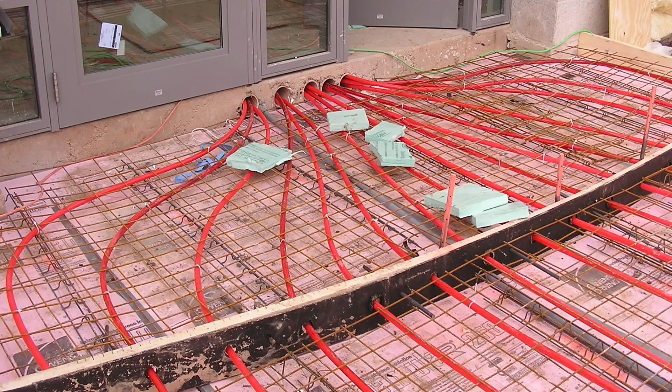Another interesting thing that we did in that building was we recognized that most of the heat that comes to the conservatory right now is from a steam plant, which is in the valley just west of the conservatory. The steam gets piped underground, goes to the conservatory, and then we send the condensate back to be reboiled and sent back to us as steam again.

Well, we recognized that condensate that we're sending back to the steam plant is still warm, and it loses heat as it goes back to get reboiled again. So we said, that's wasting heat. Maybe we can figure out a way to use that heat.

So we put this snow melt system in our front walkway, and it's tied into our building control system and the weather station, so that whenever it senses that it's cold enough or wet enough to make snow or ice, it runs that condensate through a heat exchanger, and we use that to melt the snow in the walkway. It's using waste heat to do that, and it works beautifully. We never have any snow or ice on the front walkway, and again, it's using wasted heat that would have gone back into the ground anyway.

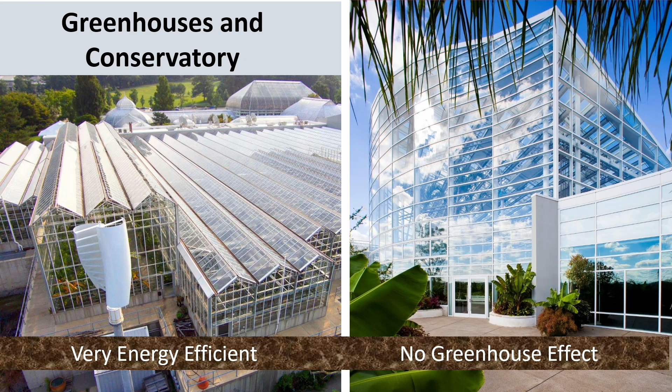For our greenhouses and our new tropical forest conservatory, both of which opened in 2006, we used a number of different strategies. For our production greenhouses, we use the open roof system, which meant it can't get hotter inside than outside, eliminating the need for fans to force hot air out of the building. We also have shade cloths, which function as energy blankets we pull over the ceiling in those rooms during wintertime to save energy at nighttime.

That actually helped us achieve LEED Platinum under the existing buildings program, and it was the first greenhouse to get LEED certified, certified as Platinum.

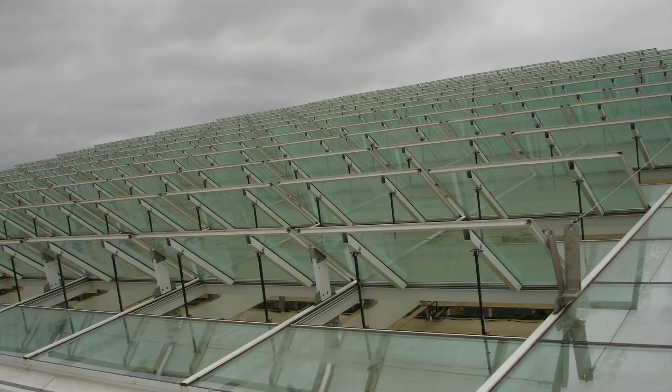Our next project was the Tropical Forest Conservatory. We were intrigued with the idea of opening the roof to let hot air escape, but recognized we couldn't do that with this giant building, so we made it so every other row of glass on the roof would open up. That allowed 50% of the roof to open, letting a tremendous amount of air exit the conservatory and helping keep the building cool.

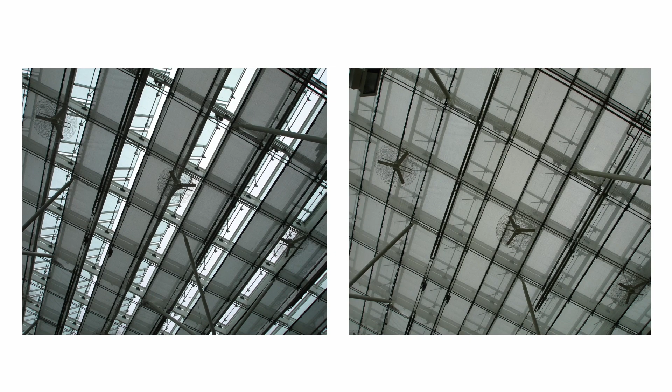We then designed a shading system that closes under the stationary panels of glass in summertime, leaving it wide open under the vents for maximum airflow with no screens blocking it. On the right-hand side, in wintertime we can close all of those shades. They're solid, not perforated, and create an energy blanket in the wintertime, again saving heat.

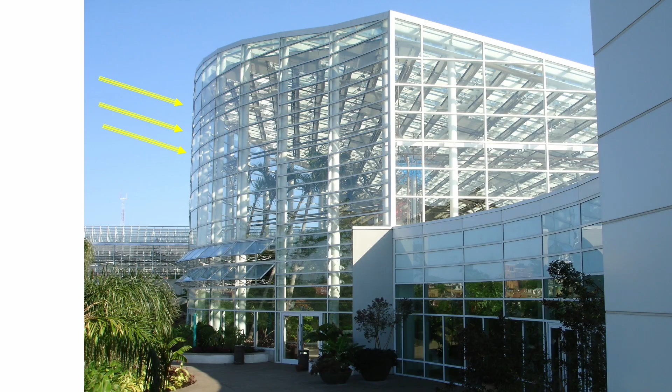Another strategy for this building: we recognized that the conservatory's shape has a really tall south-facing glass wall that slopes back to the north. It was designed that way so you can't see the new building when looking at the old conservatory from the front - we didn't want a modern building in that view. But we recognized that this creates a unique opportunity for us.

Many glass houses and conservatories use single pane glass because double pane glass blocks too much sunlight. In wintertime, when days are short and the sun is low on the horizon, you need as much sunlight as possible. When we did a sun tracking study, we realized that in wintertime, all direct sunlight comes in through that south-facing wall, none from the roof. So we made the roof double pane insulated glass, since that's where you lose most heat, saving a lot of energy. In summertime, when the sun is directly overhead, we want to block some sunlight, so the double pane glass is actually a benefit.

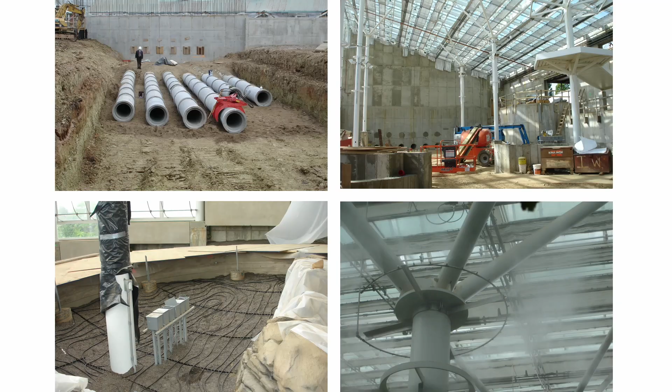Some other strategies we used: we put in 6 earth tubes running under the production greenhouses, each 300 feet long. As hot air exits through the roof, it sucks air through the tubes. They're 15 feet underground, where the ground stays about 55 degrees year round, which helps cool the air before it enters the space - it's like getting free air conditioning.

Our northwest and northeast walls are solid concrete insulated on the outside, so they act as thermal massing. We put a root zone heating system in on the lower left.

We learned that from our friends at Longwood Gardens. The idea is that if you keep the roots of plants warm in wintertime, you can turn the temperature down - great idea. But we made one error: we didn't put a strong enough barrier over the tubes, so when people used shovels to change out plants, they broke the tubes. Lesson learned - make sure you put a good barrier over your root zone heating if you follow that strategy. A misting system also helps with cooling, again reducing costs.

The beauty of this conservatory is it has no greenhouse effect. It's always 4 to 6 degrees cooler inside than outside, and it uses no energy to stay that cool, so it has no greenhouse effect.

Our Center for Sustainable Landscapes, on the lower campus, is a really exciting building for us, and I hope you'll get to see it during the tours. It opened in 2012 and met the Living Building Challenge. It met LEED Platinum, was the first building in the world to get WELL Platinum certified, a measure of how buildings affect human health, and the first building in the world to get SITES Platinum certified, which is sort of like LEED for landscapes.

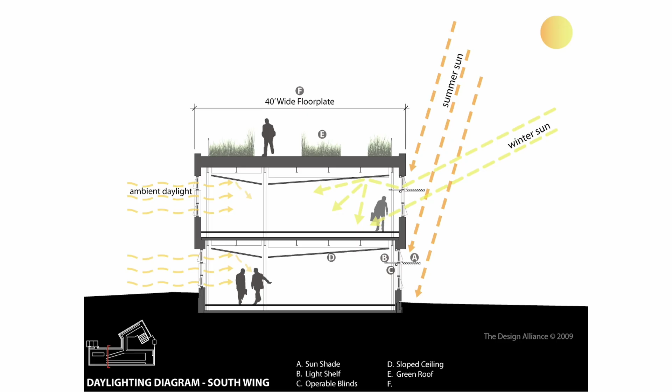So for that building, really important starting out is to maximize passive strategies. The less energy you need, the easier it's going to be to achieve the zero energy certification. So we maximized opportunities for natural daylighting and natural ventilation throughout the space. The building's super well insulated, triple pane glass windows, green roof, all helps hold energy in.

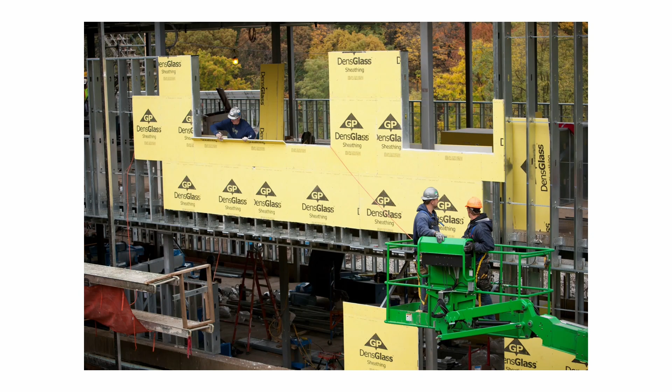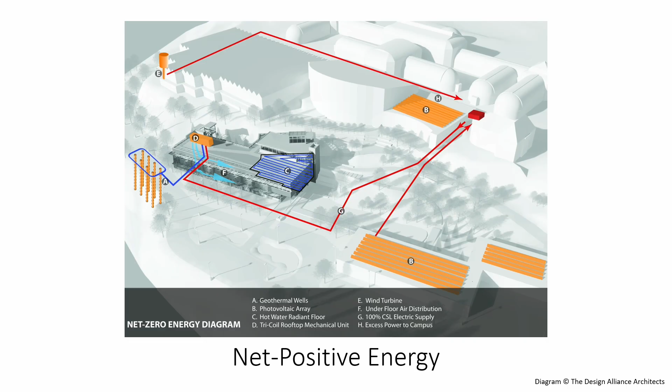And if we're producing energy, we have 16 geothermal wells, each one's 525 feet deep, and they're powered primarily by solar, and that provides all the heating and cooling for the building. For this building, we also used something that was a new technology back in 2011 when we were building the building.

We put in phase change material into all the walls in the atrium and in the roof and the ceilings of all the office areas. Phase change material, when you heat it up, it melts, and then when it solidifies, it releases heat. So we use that as sort of like thermal massing within the spaces to actually help the building stay warmer in the wintertime and help with cooling in the summertime.

The building has power, like I said, mostly by solar power. On some of the buildings, we have some roof solar over some of the parking areas. We also have a small wind turbine that provides a very little electricity, but it's more of a demonstration project. The building produces more energy than it uses each year through all of these different strategies.

Our next building on the lower campus is our nature lab, a modular construction building that met the Living Building Challenge Petal certification, zero energy, completely powered by solar on the roof. Next to it is the Exhibit Staging Center, an old public works building that we renovated to meet the Living Building Challenge and WELL Platinum. That building is a net positive energy building, solar powered, has geothermal wells as well for its heating and cooling, and it makes more energy than it uses every year.

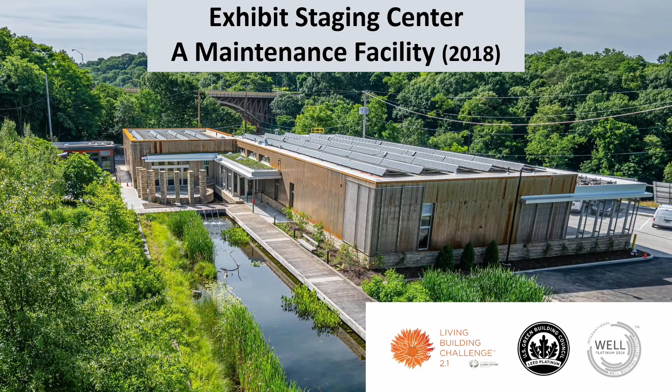A couple of neat strategies in there: battery backup for, I think it's 2 weeks worth, or 10 days worth of battery backup for running the building with the batteries. It also has direct DC lighting in that building.

Whenever you produce electricity with solar panels, it has to be converted from DC to AC to go through your lines within your building. And when you get to your lights, which are mostly LED, you have to convert it back to DC to run the LED lights. You have loss of energy every time you do those conversions. So this building was designed so that the DC power produced by the solar panel goes directly to the lighting, and there's no loss by having to convert it to AC.

So those are some of the key strategies that we used for some of the buildings that we've done work on over the last 20 years.

Looking ahead, we have this old conservatory that, like I tell people, is probably one of the best examples of the worst kinds of buildings you could possibly build. It's a single pane glass building designed to grow tropical plants in a temperate climate, which is crazy by today's standards. But that's what we have, and that's what we have to work with.

So now we're working on strategies to make those be zero energy buildings, as well as these three buildings here, the newer buildings, which our goal when we built these was to make them efficient. Our goal back then wasn't to be zero energy. So now we're going back, looking at this building that we're in right now, as well as the Tropical Forest Conservatory and the greenhouses. How can we make those be zero energy? What can we do to retrofit those buildings?

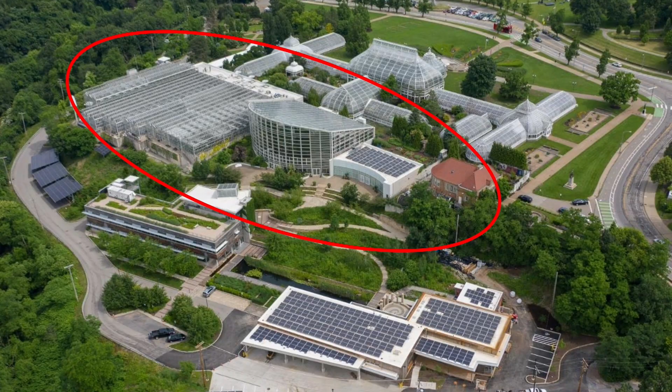But I put this first slide on to show you, in that circle up there, you can see that's the Bellefield Steam Plant. It's a cooperative. I think it's the largest steam cooperative in the country.

It provides all the steam heating not only for Phipps, but all of Carnegie Mellon University, all of the Carnegie museums, all of University of Pittsburgh, as well as all of the hospitals up on the hill over there. So it's a huge plant.

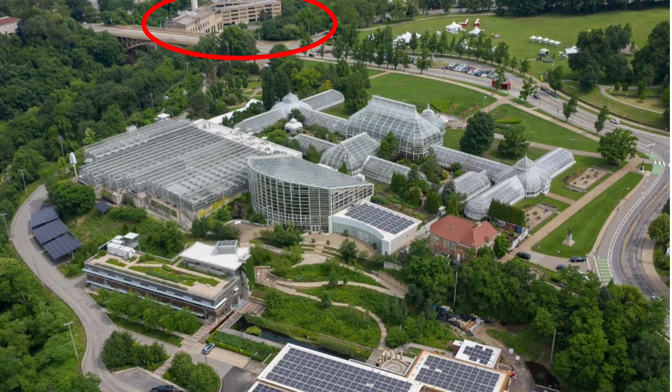It used to be coal-fired up until about 20 years ago when it switched over to natural gas, which was a big improvement, but still it's using a lot of natural gas. We only account for like 2% of the energy they produce, and that's how big a steam plant that is. But we'd like to get off of it. We want to get 100% off of fossil fuels, so that's one of our strategies right now.

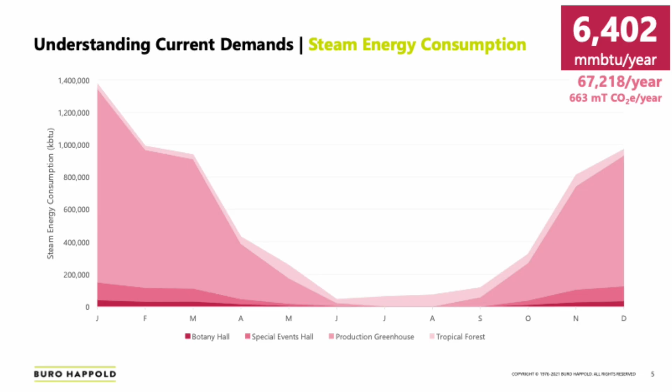So if we're starting with these buildings here, one of the first things that's really important when you're doing this work is to really understand what your current conditions are. This is a graph that shows some of the energy use over the course of a year. Then we start looking at how we can address that.

For us, we're looking at things like heat pumps, geothermal. We also analyze solar PV and solar thermal. I don't have time to go through each of these in detail, but just to tell you some of the things that's really important to look at.

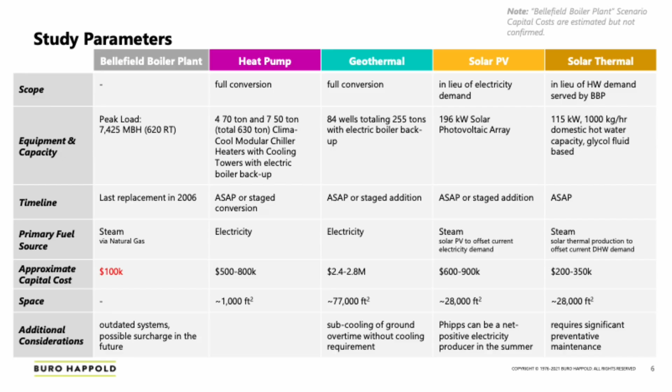Here, again, some of the study parameters, looking at what the energy performance would be. You can see the purple, the heat pumps, and the blue, the geothermal, greatly reduce the amount of energy we would need compared to the one that's gray, that's the Bellefield Steam Plant right now. So those are two really attractive opportunities for us for reducing steam heat and fossil fuels.

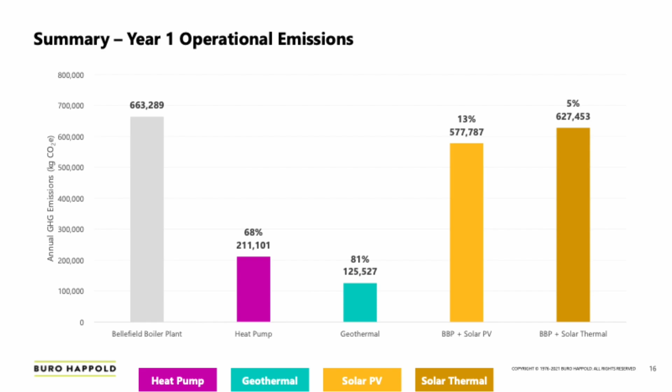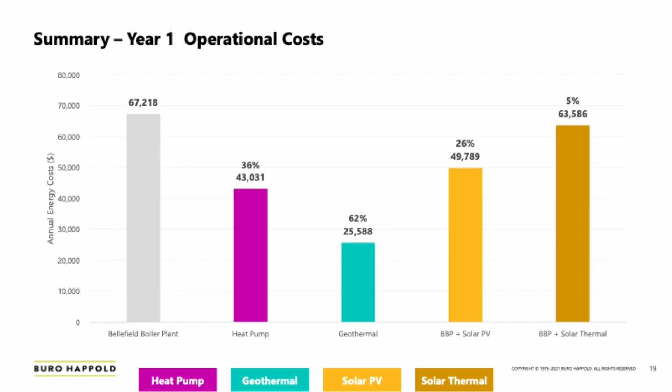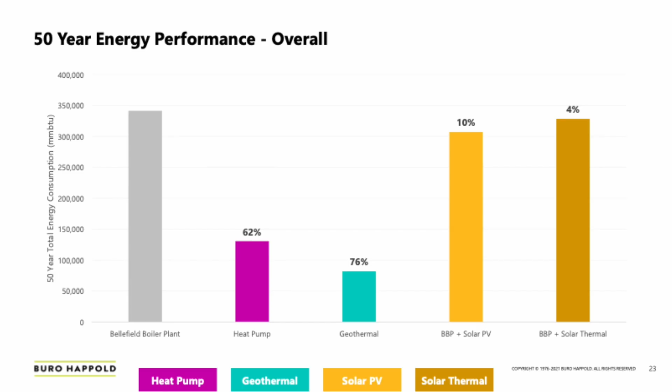For emissions, both of these show quite a significant reduction, with geothermal being much lower. Operational costs, again, the heat pumps and geothermal are much better than any of the others, geothermal being the best. And then look at the 50-year overall performance, because we're really focused on 50-year thinking, that's how we like to look at things when we do things with Phipps. Again, a 62% reduction and a 76% reduction with both of those. Here's a summary of the performance.

And then here, this is important: geothermal is very expensive to install. Drilling wells for us to do wells for our entire upper campus would be over, I think, 130 wells we would have to build. So that's really significant. And even for this portion of the back of the upper campus right here, you can see the geothermal is going to cost more than we would save.

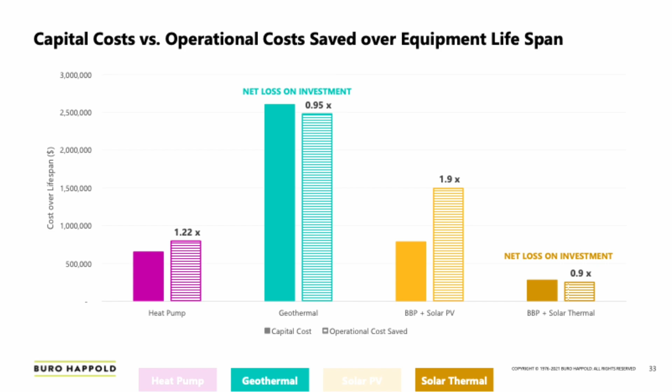On the purple, you can see that the heat pumps actually would help pay for themselves over time. So the heat pumps are becoming a little bit more attractive to us. Still would allow us to get 100% off of fossil fuels. Not as efficient as the geothermal, but definitely much more effective for us. So here are some of the takeaways.

Another advantage of heat pumps is because they're smaller units, you can take some offline and put some online as you do things. Another important consideration with geothermal is it only works if, not only if you're extracting heat from the ground, but in the summertime you have to put that heat back. When you're looking at conservatories and glass houses, typically we're not trying to cool the spaces, so it's going to make the geothermal wells a lot less effective unless we could find a way to use that cooling in the summertime.

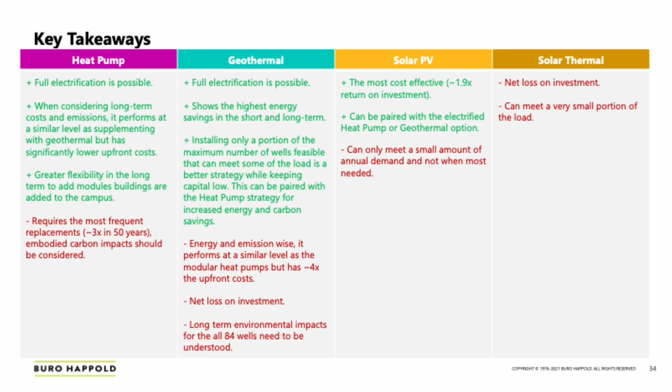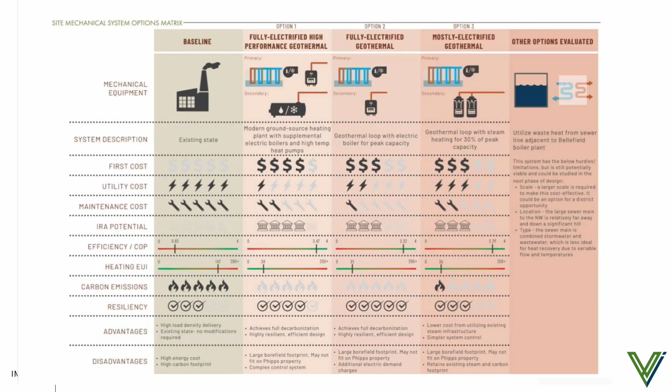Another interesting thing we're looking at is sewer heat recovery. There's a giant trunk line that runs through behind the conservatory. All that warm sanitary water from everybody flushing their toilets and taking showers and everything else running behind us, that's a great opportunity to extract that heat for heating buildings.

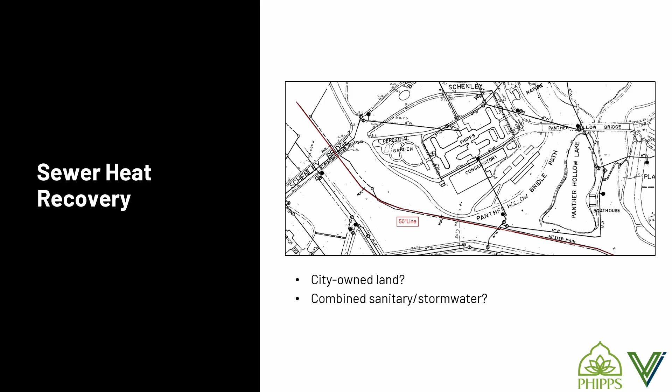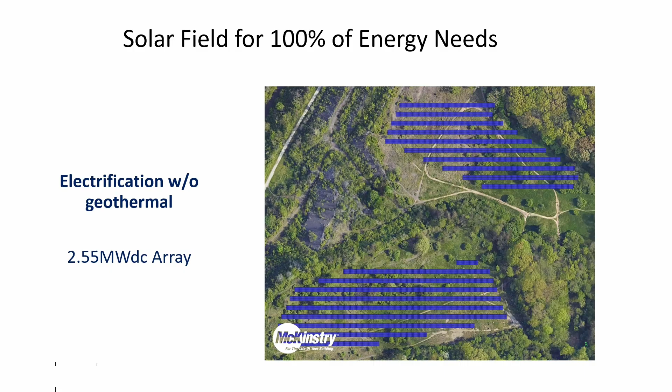It's a little bit too far for us to use, but we're trying to convince the Bellefield boilers to actually build a sewer heat recovery plant. And if they do something like that, we might stay with them for providing energy instead of doing these things ourselves. And then lastly, we're looking at putting in a 2.5 megawatt solar field on an old slag field nearby here. That would get us 100% of our electricity from solar going forward. So those are some of the key things we're looking at at Phipps.

And I'm going to go. Sorry about that. Okay.

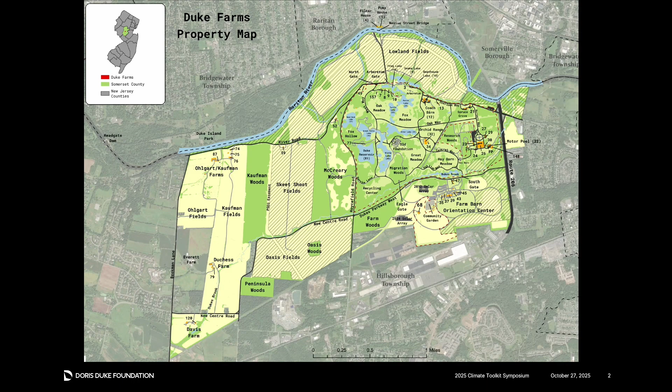So it puts us in a really interesting rural, suburban context, and we operate a lot like a small town. It was a former estate of James Buchanan Duke and Doris Duke. We manage over 100 buildings, and we own our own electrical circuit and utilities, and we welcome over 100,000 visitors a year, and sponsor many mission-related events and conferences. So it's a very active site for the community and for our mission and the foundation's mission, and it gives us an incredible opportunity and responsibility to really model what decarbonization and sustainability looks like at an institutional and campus scale.

Back in 2015, we started what's now called our Natural Systems Energy Plan, which lays out 5 key steps. While it's shown linearly here, I'll note that we're constantly evolving, and the final 3 of these are on a continuous feedback loop. So the 5 steps are: first, establishing a baseline - we quantified our energy use and emissions across all systems. Second, clarifying our goals. Third, prioritizing strategies. Fourth, implementing and optimizing, which we're constantly doing. And fifth, tracking, visualizing and refining. I'll walk you through each one briefly.

First, establishing a baseline. As all of you know, it's super important to understand what your carbon footprint is. So in 2015, we completed both a carbon emissions inventory and a traditional energy audit, because the first thing you want to do is look at energy efficiency and conservation in your buildings and campus to really reduce your demand for carbon emissions. The emissions work helped us understand where our greenhouse gases were coming from, and the energy audit showed where we could make improvements in building envelope work and efficient lighting and things like that - a lot of low-hanging fruit with short payback times.

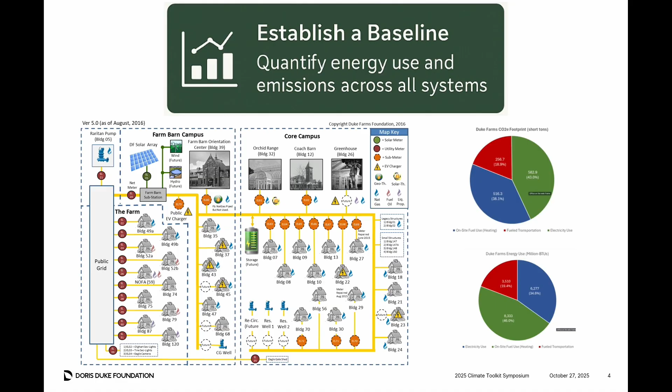What's really fascinating about Duke Farms, after we did this carbon footprint, is our energy and emissions breakdown closely mirrors what you see nationally, a national average. About a third each from electricity, heating fuels, and transportation of our emissions comes from those sectors, our fossil fuel use. That makes our site a nice little microcosm of what we need to do at campus scales, at personal scales, sort of nationally, just scaled down to Duke Farms.

Okay, the second thing, clarifying goals. Once we had a baseline, we set clear, time-phased decarbonization goals: 100% clean electricity by 2025, 80% emissions reductions by 2030, carbon neutrality by 2035, and by 2040 we aim to be carbon negative, meaning our lands will absorb more carbon dioxide than we emit.

The next step was prioritizing our strategies, and these strategies will not be a surprise to any of you. Two specifically stand out. One is land restoration. As I mentioned, we had Rutgers University do a carbon baseline. So because we steward 2,700 acres, we're actively investing in natural climate solutions to help us reach that goal, from reforestation to soil carbon retention.

One of our biggest initiatives right now is converting 112 acres of what were agricultural lands along the Raritan River to native forests. We're planting over 55,000 trees and shrubs. We're not selling carbon credits on it, but we're effectively selling them to ourselves, evaluating the carbon impact of planting that many trees.

So again, using our natural lands to figure out how we need to absorb carbon dioxide, because I think that's something that gets lost a little bit in decarbonization, since we've emitted so much historically. We're already at like 425 parts per million or whatever it is in the atmosphere, and we know that's going to have huge impact. So the message is: yes to reduction in emissions, yes to natural climate solutions, yes to carbon dioxide removals, yes to it all.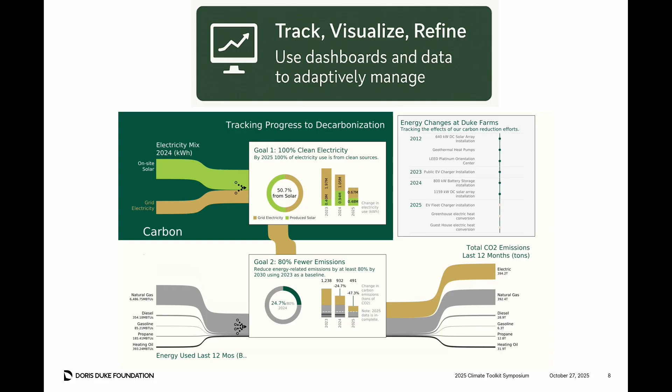We're going to expand it also eventually to show carbon removals. So if you see the Sankey diagram on the bottom, showing our CO2 emissions in the last 12 months, we want to have another branch showing that for electricity, we're using Class 1 RECs. For natural gas, we're using our own natural climate solutions. And for diesel, gasoline, and other things, we buy carbon dioxide removals. Again, showing that whole picture that we need to do not just decarbonization, but also removals from the atmosphere.

So what we've learned is that it's possible to do this with off-the-shelf technology. You can do it iteratively. It's not as expensive as you think. In fact, Margaret and I had to sell this battery energy storage system to the board.

We were going to be paying quite a bit more in utility costs. But we said, listen, we're reducing our carbon emissions. We're innovating. We're a foundation, we can spend a little bit more on things. It's a public good.

But our economic models have turned out to be way too conservative, because in the meantime, the hyperscalers, the AI demand, and the demand for electric vehicles and heat pumps on the grid is really increasing the costs. We've seen about a 20% increase in utility costs in New Jersey, which means our economics were way too conservative. So we're actually going to end up saving more money more quickly with the battery energy storage system. So it's possible, and it's less expensive than you think.

And it really works. We've reduced our emissions, we're stabilizing our costs, and we're increasing biodiversity with our restorations, all while managing a really complex historic campus. So thank you very much. I look forward to the questions and answers.

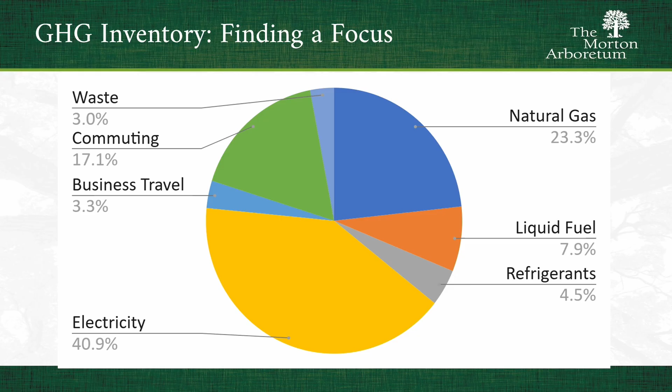So our first big step in this journey was to create a greenhouse gas inventory and to really understand where our emissions are. We started in 2021 with this process and looked backwards to 2019 to develop a baseline. Not surprisingly, we found that electricity was our biggest source of emissions, followed by natural gas, and then followed by commuting. This started to help us think strategically about how we were going to approach reducing our emissions. So that was in 2021.

And in 2023, we developed a sustainability strategy for the Arboretum, and this is our roadmap to 2040. We've also been in parallel engaged in a comprehensive master site planning process, also thinking about where we are now and where we hope to be in 2040, and really trying to intertwine sustainability with all the different ways that we want to grow as an institution.

So the different aspects of our sustainability strategy: first, the built environment. Even though most of our 1,700 acres is forest and prairie and wetlands, most of our carbon emissions are, of course, from our buildings. So thinking about our built environment, we have a lot of historic buildings, so thinking about both the ways we can retrofit those, and then as we build new buildings or need to replace some of our failing buildings, our goal is to build net zero going forward.

And in terms of vehicles and mobile equipment, we do have a really substantial fleet, as you heard from others also, who have a lot of property, a lot of vehicles, a lot of landscape equipment.

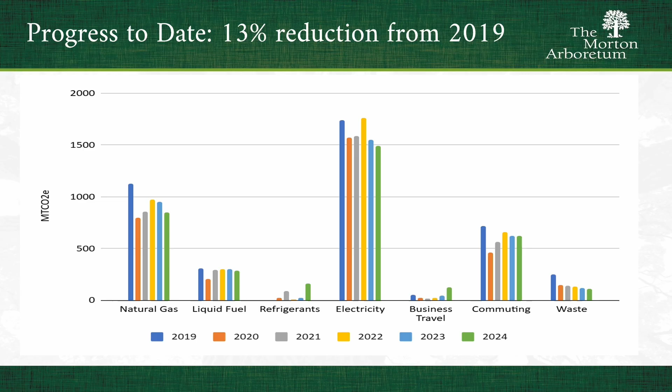This is an ongoing journey that needs to happen every year, and we need to just keep chipping away. While our solar array is going to take a really big chunk out of our carbon emissions, we're still going to continue really pounding on all the other aspects of our greenhouse gas inventory.

Some areas of growth for us, and topics I'm really interested in talking about with others during coffee breaks: our greenhouse gas inventory doesn't include everything it could, and one of my goals is to expand our understanding of how fertilizer use impacts greenhouse gas emissions, and also purchased goods, which is that scope 3 piece that's really hard to wrap our brains around, but I think is really important. Those are areas where I'm hoping we can get a better understanding of our emissions so that we can manage them.

And then in terms of electrification, I'm really excited about what's happening in the industry in terms of the development of more powerful and capable robotic mowers. So if anybody wants to talk robotic mowers at coffee break, please come find me. Thank you.

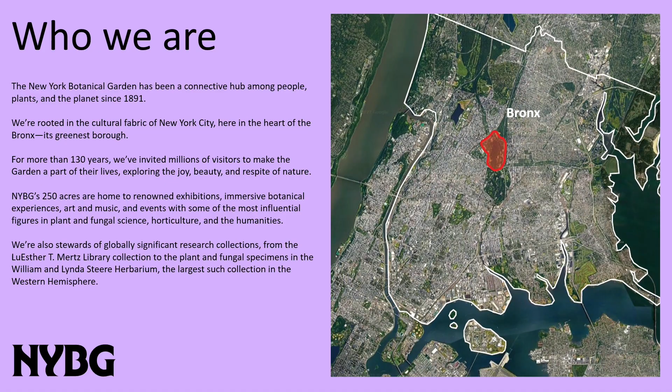We're also stewards of significant research collections, from the LuEsther T. Mertz Library Collection, which was one of the first botanical public libraries in the U.S., as well as the William and Lynda Steere Herbarium, which is the largest herbarium in the Western Hemisphere.

Here's a map of the garden, our 250 acres, which includes a 50-acre old-growth forest, one of the 2 remaining native forests in the 5 boroughs of New York. We are lucky enough to have the Bronx River flow through our grounds, as well as other lakes, streams, and wetlands that assist in the biodiversity of our horticultural specimens.

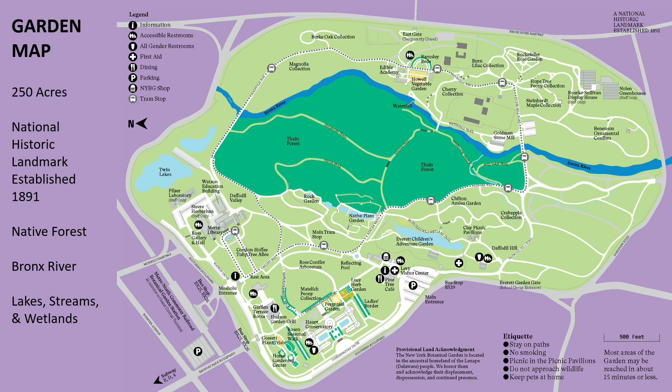We have over 25 buildings and structures built from 1891, with the latest built in 2018. It is a portfolio of conservatories and glasshouses, a botanical museum with climatized exhibition galleries, a botanical public library, the herbarium, visitor centers, restaurants, catering venues, education centers, laboratories, and all the back-of-house facilities that keep us operational, which there are plenty of. And of course, we have our gardens to upkeep with the same operational facilities.

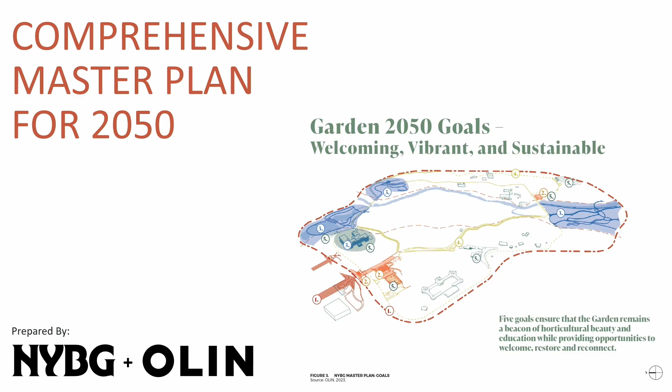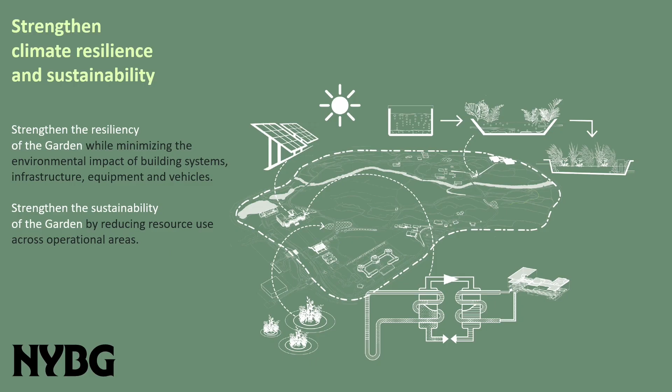In 2022, we embarked on a comprehensive master plan for 2050. This master plan was founded on 5 goals developed through NYBG leadership. One of those goals was to strengthen climate resilience and sustainability, strengthen the resiliency of the garden while minimizing environmental impact of building systems, infrastructure, equipment, and vehicles, and strengthen our sustainability by reducing resource use across all operational areas.

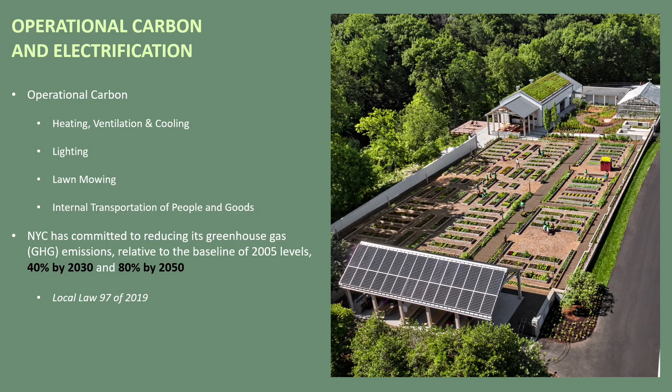Our operational carbon is contributed by our HVAC systems, lighting, lawn mowing, and internal transportation of people and goods. Those are the largest contributors. New York City has committed to reducing its greenhouse gas emissions through Local Law 97 of 2019 by 40% in 2030 and 80% by 2050. The garden has committed to these garden-wide. This goal and these local laws apply to large buildings, but we have decided to implement it to the entire garden, including all of our smaller facilities.

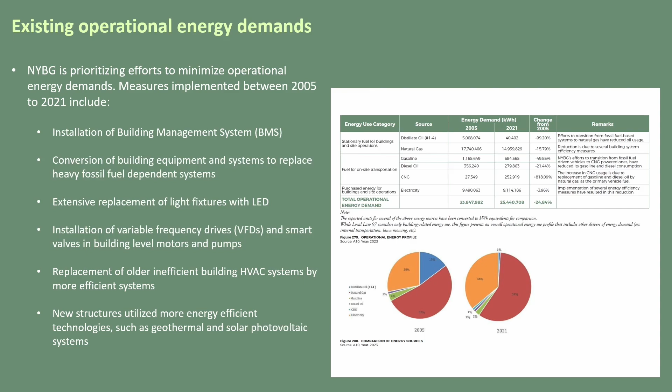We've been prioritizing these efforts to minimize operational energy demands since 2005. What we see here are a list of measures implemented before the comprehensive master plan that have shown a reduction of about 24% of energy use through the installation of building management systems, conversion of building equipment to replace heavy fossil fuel dependent systems, replacement of light fixtures with more efficient LED systems, installation of VFDs and smart valves, building level motors and pumps tied back into our BMS systems, and a commitment that all new structures are going to be entirely electrified, and explore the use of renewable energy systems such as geothermal and solar PV.

Since 2019, we've made efforts to offset some of the energy through purchase of RECs. More notably, we've been working with the New York City Department of Administrative Services, DCAS, on energy feasibility studies for the implementation of solar across our grounds. 6 sites have been studied and can yield up to an 11% reduction based on our 2021 electricity demand. There are challenges associated with these.

Funding, of course, is one of the largest challenges. Fortunately, New York City wants to support us financially, and all these solar PV arrays, they're happy to fund. However, we are responsible for making sure that the buildings and the roofing are ready to receive these PVs. So there are structural limitations in some of these properties that we're studying to see whether or not they can receive the solar PVs, and then of course the funding associated with replacing roofing so that it's back at 0 years old and has 30 years of useful life before we have to take off the PV systems and replace the roofing again.

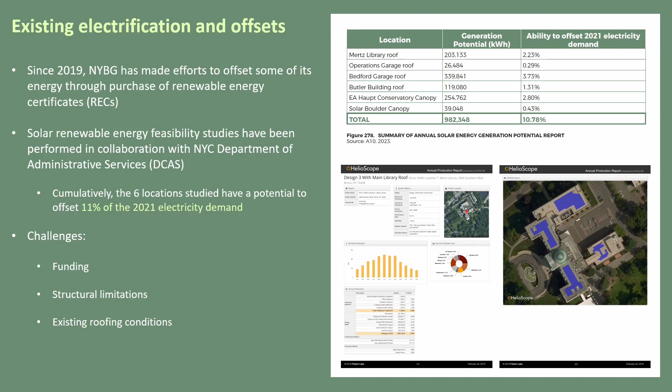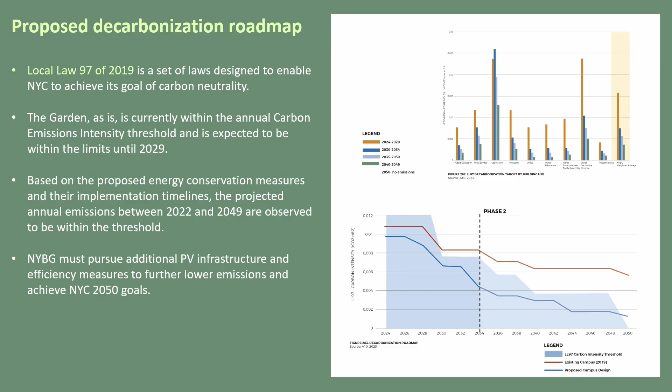Based on the new comprehensive master plan, we are tracking pretty well up until 2049. We do have a few more upgrades that we need to make in order to meet those 2050 goals. But we are confident that with energy systems development over the next 25 years, solar PV systems are going to generate more efficient systems for us, and we can get to the goals that we need to.

Recommendations for new buildings: we want to make sure that all new buildings operate on all-electric mechanical systems with the goal of net zero or better, net positive operations, by using energy efficient envelopes and energy efficient systems that also tap into renewable energy systems. We'd like to achieve below EUI targets per building typology, or a 30 to 40% reduction over the LEED baselines. Of course, install roof photovoltaic systems for all roofs where feasible. Where they are not, we'll go with green roofing systems.

And provide building level energy metering. That is something we lack across the garden. Not all of our buildings are metered, so that makes it difficult for us to understand who the worst culprits are in terms of our energy demand.

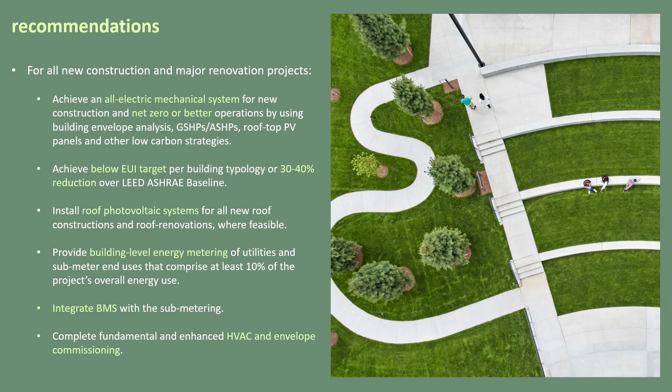And integrate BMS with all the sub-metering and with upgrades to the systems. And on top of that, complete fundamental enhanced HVAC and envelope commissioning so that we ensure we are getting the most out of the systems we are investing in.

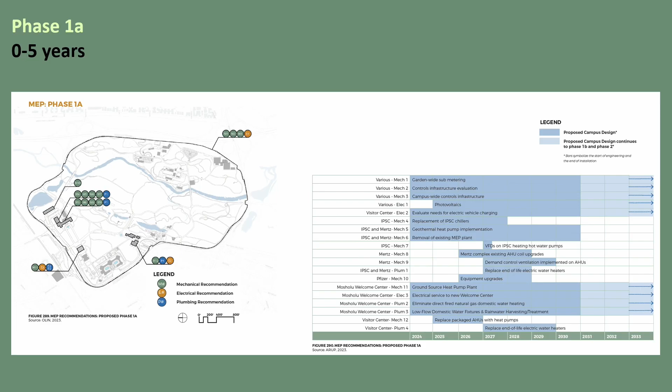Gonna skirt through these slides, but we have a plan. It's important that we've set our goals, and then we create a framework to get there. We have a framework for the next 5 years, for the next 5 to 10, and then beyond those 10 years to 2050. This will help us keep on track to meeting those goals.

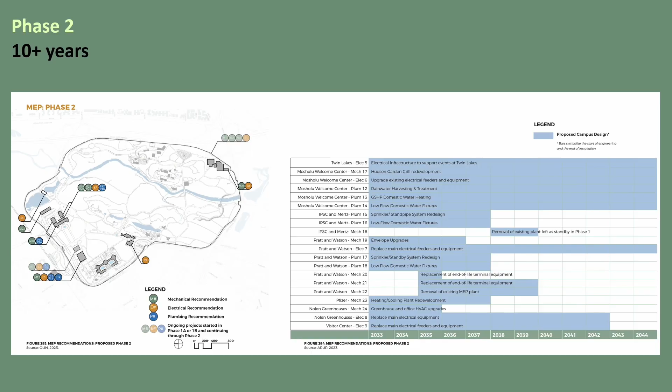So recommendations for advancing with all of our initiatives are to analyze wood structures for new buildings as opposed to steel and concrete, reduce the project embodied carbon by a minimum of 10 to 20% in the structure and enclosure through the change of these materials and systems. Ensure that 50 to 60% of new wood by cost is FSC certified, divert 80 to 95% of construction demolition waste, and compost 100% of our organic waste and provide sufficient space to do so.

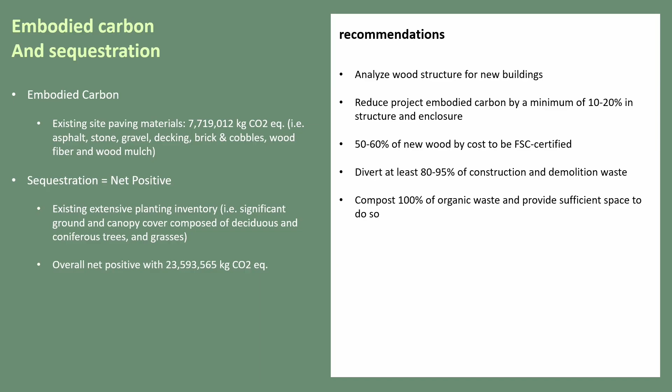How we do all of that, we're still working on it. But those are the recommendations that'll get us to where we want to be.

So I'm going to get into two projects. One is a new build, and one is a project on an existing building. Apologies about the font, we have a new funky font that we've recently developed, but it didn't come through here.

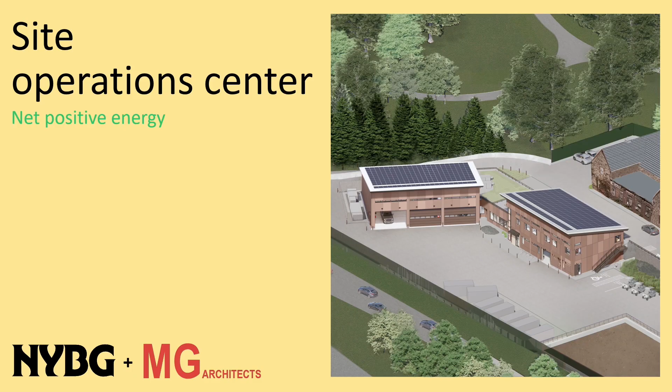So our site operations center is a new building that is set to be a net positive energy building. We started the design in 2021. It is being funded by a plethora of sources: private, city, state, and federal. Lots of pots for us to navigate in the funding processes. And we're very excited about it.

The design was completed in 2023. We submitted a funding request to the city in 2024, and that typically sits for about 2 years, usually 3, until we can break ground.

So some of the sustainable design features for this building: it is a back-of-house facility. Embodied carbon reduction through the use of a mass timber structure as opposed to steel and concrete, utilization of ultra-high performance concrete cladding, energy efficient systems such as geothermal heat pumps, ERVs, and high-performance LED lighting, a robust exterior envelope that is highly insulated with optimized performance glazing and thermal break assemblies, on-site renewable energy.

So the larger masses of the buildings have roofs that are sloped to the southwest, and they are maximized with solar PV systems. The lower roof is a green roof system. In addition to the solar PVs, this building will be supplemented by 10 geothermal wells, about 500 feet deep.

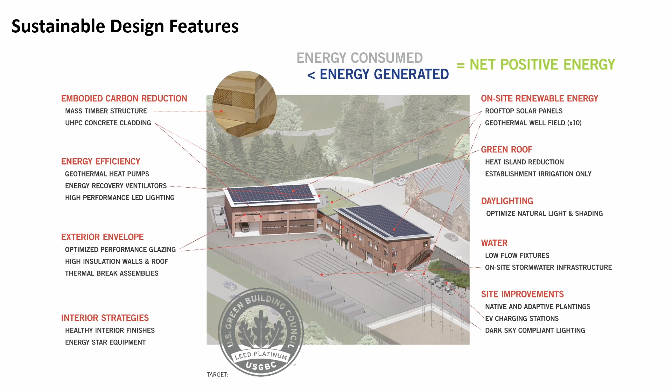And other, it's not energy, but water. We care about our water in New York, low flow fixtures, and we already have an on-site stormwater detention system. We are now building a stormwater infiltration system so that we infiltrate as much as we can before it's detained, contributing to New York's already over-exhausted stormwater system.

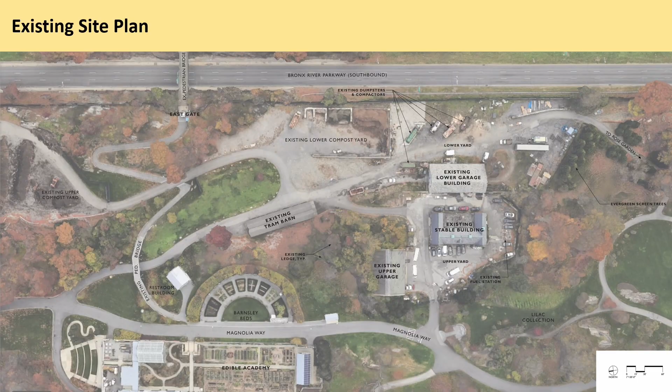An existing site plan, again it's back of house. So we have 3 back of house buildings that make up our operations department. The existing lower garage building has outlived its useful life. There are some structural issues with it.

It will be demolished for the construction of this new net zero energy building. That new building will occupy all of the program that's currently occupied across the 3 buildings, and the other 2 buildings we hope to one day return back to the public realm of the garden.

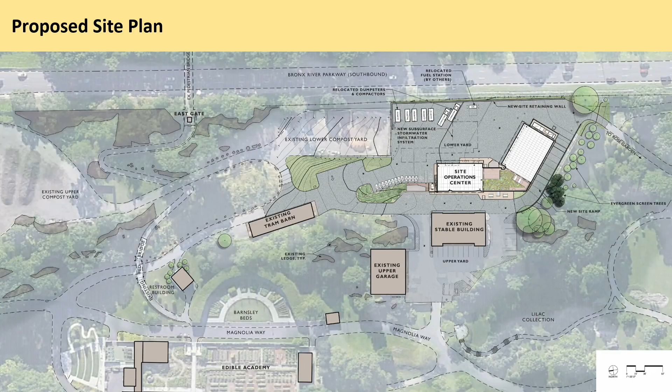Really quickly, it's administrative spaces. The lower level includes shops, a vehicle repair, vehicle storage area, locker rooms, and multi-purpose room for our operations departments.

In terms of energy efficiency, the building will be supported by 7 water-to-air heat pumps that'll provide heating and cooling to the conditioned spaces. Some of the spaces require heating only, such as our vehicle repair area and the shops, and so there will be water-to-water heat pumps to provide that heating. There will be 3 ERVs for 100% outdoor air handling units with energy recovery ventilators to provide conditioning for office spaces, locker room, and shop areas.

As you can see here, our baseline—we were looking at a Local Law 31 and 32 baseline, which sets standards for our energy use, against also the LEED baseline.

We worked with the Department of Citywide Administrative Services. We're very fortunate that New York City does support these efforts. We've covered the entire design for this building to meet the local law requirements. Anything in addition to those requirements to make the building more energy efficient, DCAS has funded us for feasibility studies and is considering funding us for those actual build systems. We're very grateful for that support—it's allowed us to understand what we can do to really push the envelope of these buildings.

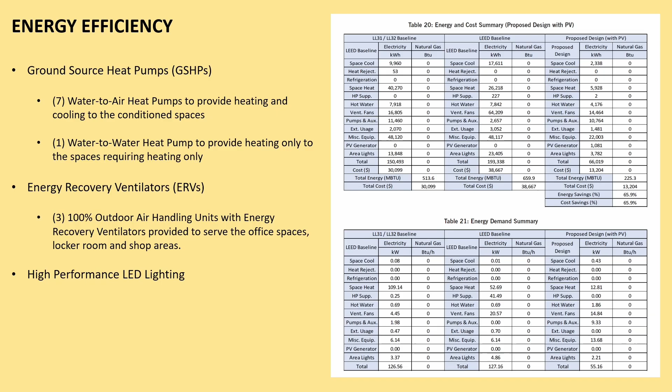So just looking at this here, there's a 65% energy reduction from the local law baseline, and what we're able to push through this funding: the exterior envelope with ultra high performance concrete cladding, optimized daylighting strategies making sure all the spaces that need daylight are put up against the edges of the building, and a high insulated roof and walls that are prefabricated wood frames.

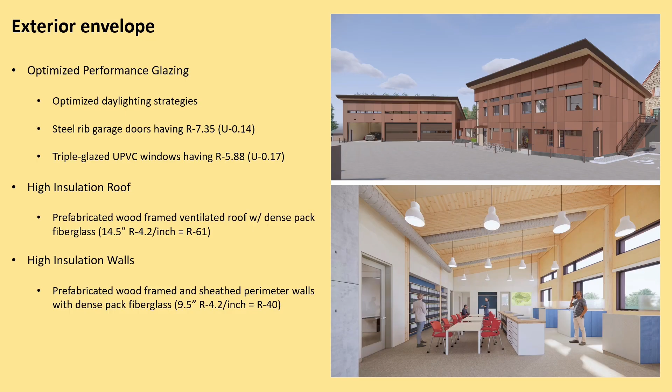We've done solar studies to ensure that we are setting up the array in the best way possible. This building is expected to require about 130,000 kilowatts of energy per year. The array should generate approximately 150,000 kilowatts per year, making this building net energy positive, about 18,000 kilowatts a year.

We have our own internal grid. There are 2 points of connection with the city electrical system. Beyond those 2 points, we have a medium voltage line that feeds all of our buildings. So this building, any excess energy it creates annually will be returned to the other buildings within our grid, resulting in a reduction of the energy that we're pulling from the city itself.

And then we have 10 geothermal wells on site that will supplement those heat pump systems.

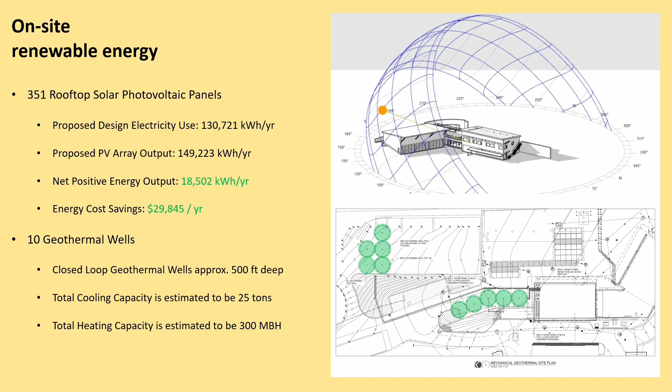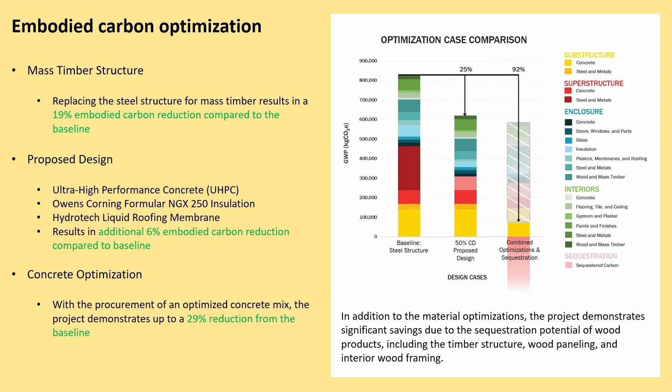The proposed design utilized ultra high performance concrete, higher insulation systems, Hydrotech liquid roofing membrane, and all that resulted in an additional 6% embodied carbon reduction, followed by the optimization of our concrete mixes, which got us to a 29% reduction from the baseline. And then when we consider the carbon sequestration by using the wood products, we're looking at about 92% reduction in that embodied carbon.

So it's easier to get a new building to be net zero. It is much more challenging, I believe, to get existing buildings to get there. And we have a lot of existing buildings, again, that date back to 1891, one of the oldest being our museum complex. So we've set a roadmap to get to net zero.

The museum complex is made up of the original museum building, which is a landmark structure built in 1899, with a wing—the Pratt Library wing, built in the 60s—our Watson Education Center in the 70s, and the International Plant Science Center, which is our herbarium, in the 90s.

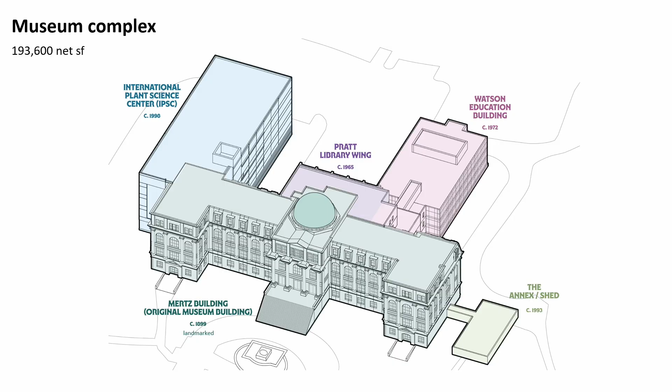Currently, in terms of existing conditions, the landmark original building has a set of 3 boilers in its boiler room: 2 are 300 horsepower dual fuel systems which have outlived their useful lives, and one 100 horsepower gas-fueled steam boiler that has also outlived its useful life, along with 37 air handler units used for heating only—they're able to do both heating and cooling, but at the time they were installed, we only had enough funding to install the systems that would pump hot water to these air handler units.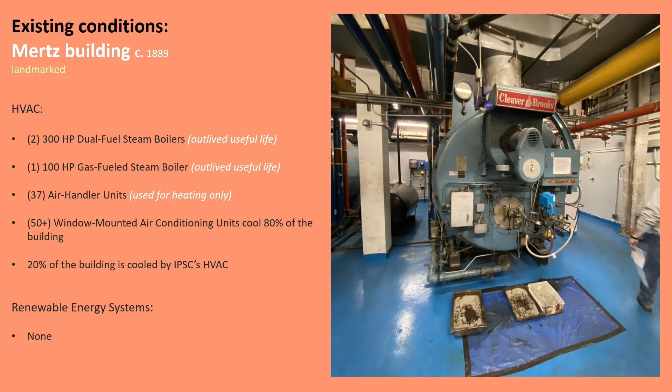In addition, we've got about 50 plus window-mounted air conditioning units on our beautiful landmark facade, providing about 80% of the cooling in the building, with 20% coming from the chillers in our IPSC building. The International Plant Science Center has 2 300-ton chillers, which have also outlived their useful lives, and 2 300 BAC cooling towers. Heating for this building is supplied by those steam boilers in the Mertz building. It's a web of HVAC systems in this complex.

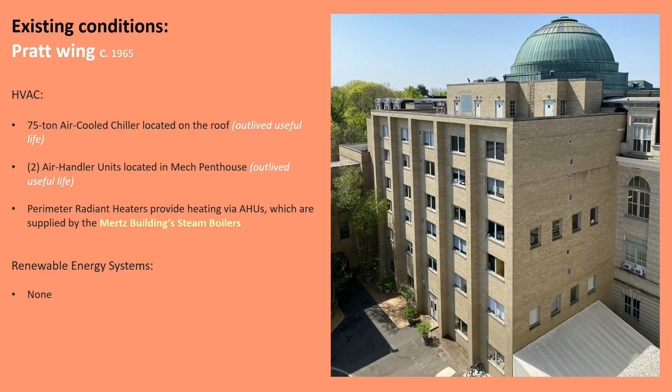The Pratt wing has an air-cooled chiller located on its roof that has outlived its useful life, and 2 air handling units located in the penthouse that have also outlived their useful life. The heating is provided through air handling units, which are supplied by the steam boilers in the Mertz building. And then our Watson building is much of the same.

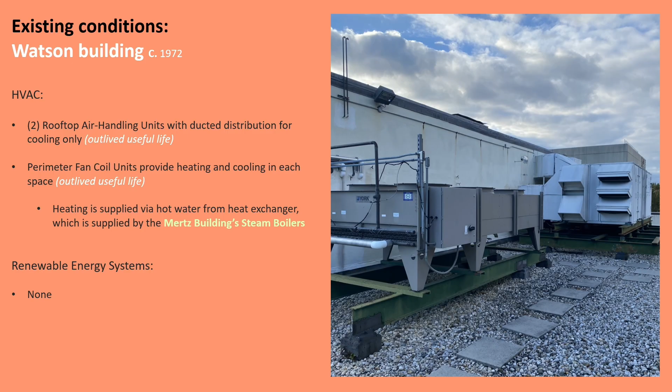Systems that have outlived their useful lives and are in need of replacement, with heating supplied by those steam boilers. So how do we get to net zero?

We've got 4 phases planned, along with other initiatives across the garden. Phase 1 is a replacement of these chillers, currently in construction. This past weekend we shut down our existing chillers for the very last time, and they're starting to get removed and replaced. They need to be substantially completed by April 15th, when we need to be cooling again.

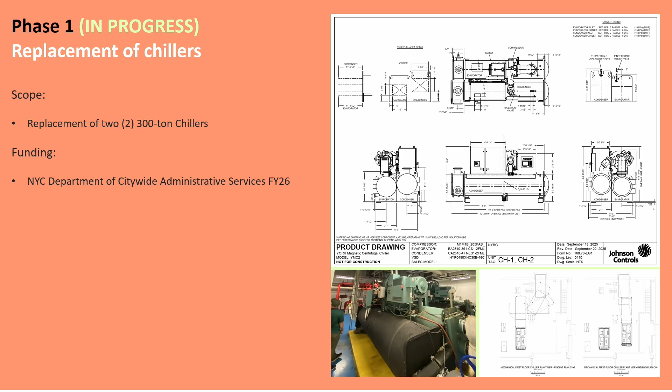This project is fully funded by the New York City Department of Citywide Administrative Services, which we're very grateful for their support. Phase 2 will require the removal of 2 of those dual-fuel steam boilers from the Mertz building, and they will be replaced by 9 electrified heat pumps, supplemented by 90 geothermal wells across our parking lot.

It's hard to see here, but there are a lot of trees along the site, and a lot of utilities that we will be weaving around to make sure that we can install these 90 geothermal wells with drill rigs that don't interrupt any of the drip lines.

We'll also be installing a dual temp pump system. The goal is to allow those 37 air handling units to not only provide heating, but also cooling, making the most of what we already have, and then removing those 50-plus window air cooling units throughout our landmark facade.

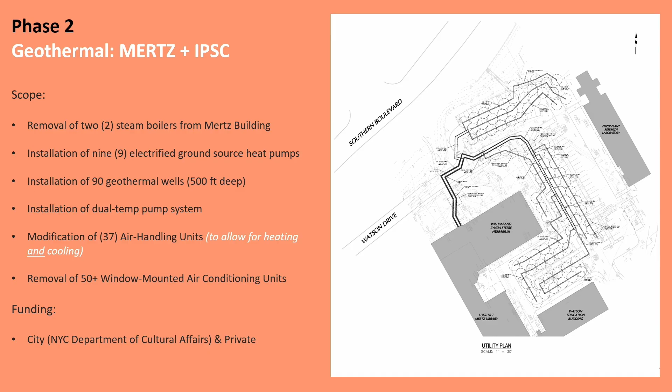Funding for this will be supported by the New York City Department of Cultural Affairs and private funding as well. Phase 3 is the elimination of that final boiler for what we expect to be additional heat pumps and geothermal wells. We've just initiated a feasibility study with PCAS to understand what that would mean, and then we'd be kickstarting the design for that system.

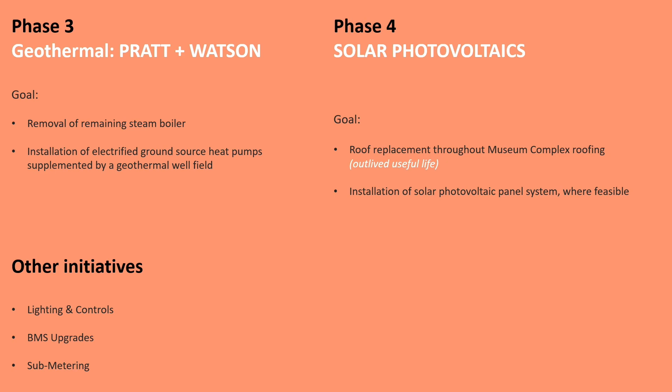Phase 4 is solar photovoltaics. Phase 3 or 4 might be swapped depending on when our roofing can get replaced, but we'd be trying to install solar PVs across all of the roofs where we get a good yield in solar energy, and we'll make a good case with the city for putting it on our landmark roof, making sure it's not visible from grade.

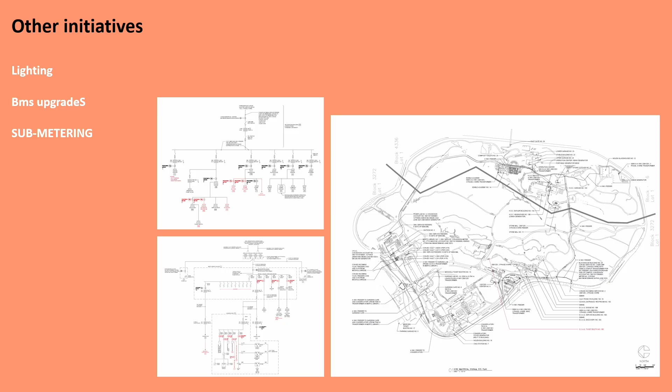Other initiatives include enhancements to our lighting and controls, upgrades to the BMS system across the garden, and sub-metering. What you see here is a site plan of the garden's electric infrastructure, and our attempt at creating a riser diagram for all of the electric building services. All of the systems in red are proposed new sub-meters so that we can understand what buildings are our largest culprits. Thank you for your time.